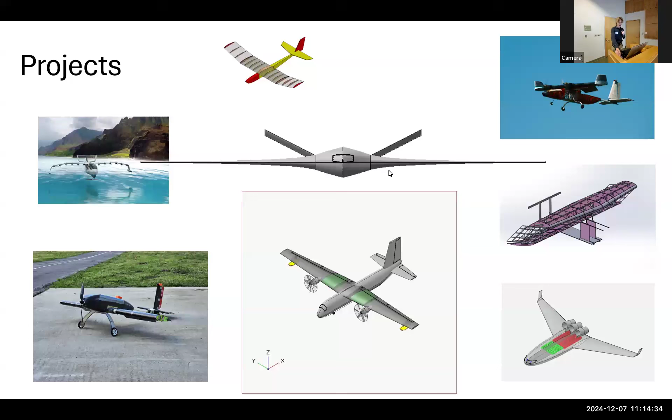So somebody actually reached out to myself and my colleagues at the Human Powered Flight Research Team. Does anybody here know of Red Bull Flugtag by any chance? It's a competition hosted by Red Bull where you build essentially a hang glider and toss it off a platform. It's mostly a showmanship competition, but a very interesting aero problem. And so I got to have a little bit of fun with this.

Interesting configuration there. On the left is us testing a 2/7 scale model, and on the right it's the full scale thing. Unfortunately, we had a bit of a structural failure, so the flight wasn't quite majestic. Still glided around 40 feet, but a very, very fun experience overall.

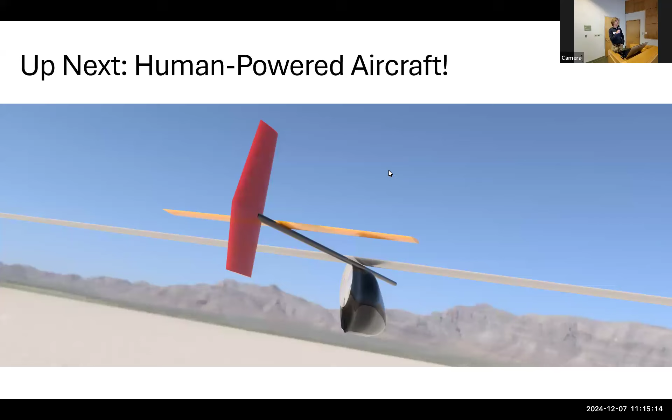And up next, human-powered aircraft. That's what I'll probably be busy with for the next couple of years at USC. So let's get into the topic of today.

The talk is kind of split into three parts. I'll first give an introduction to the motivation behind this, which is solar radiation management. Then I'll talk about my design. I'll try to fly through that pretty quickly because at the end I have some exciting work that I've been doing, specifically a piece of code that I've written for performance analysis that gave me some results, but there's a lot of next steps there. I'll talk a little bit about that. But yeah, so let's get started.

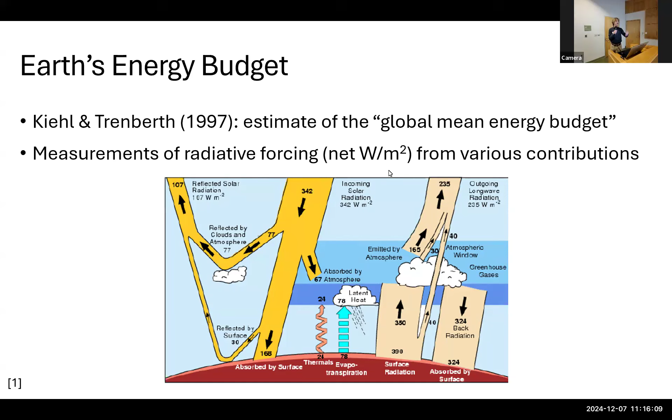In 1997, two scientists published a very important paper that essentially summarized and quantified where energy is absorbed and reflected into and out of the Earth and within it. This diagram became known as the Trenberth diagram, and it's essentially a summary, in units of watts per square meter, of where energy stays or leaves the atmosphere. And in the topic of climate change, with temperatures rising around 0.2 degrees Celsius per decade, this is really important if we want to understand how we can mitigate the effects of this.

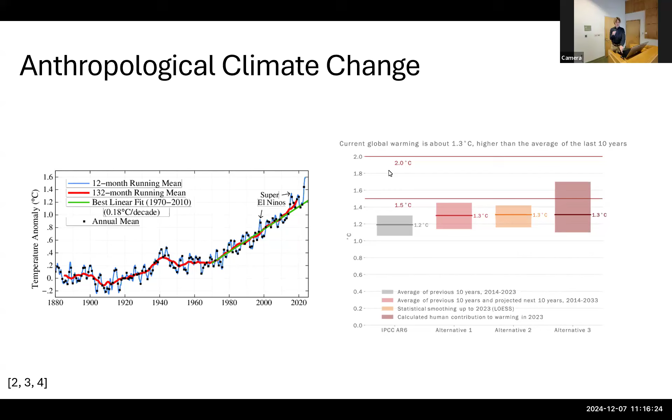So there's a couple of options. Option number one, which is what is used most and what has been most studied and is implemented the most currently, is to address this right side of the diagram. So reduce how much heat we are keeping in the atmosphere by absorbing it, mostly due to greenhouse gases.

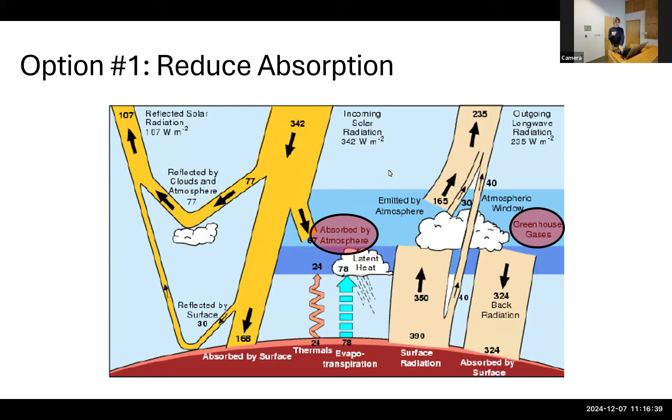A couple of interesting papers that I've read and some interesting findings is it's been pretty well shown that it's technically feasible to halt the increase to achieve greenhouse stabilization. Although a lot of these models assume pretty optimistic use of carbon sequestration methods and even some economic and legal ways. For example, the European Union emissions trading system, which is far into the program.

And another interesting thing I found is a lot of people are also warning of this term called mitigation deterrence, which is putting too much optimism into carbon sequestration instead of just reducing carbon emissions in the first place. Another interesting thing that I actually learned from Dr. Bradley's class.

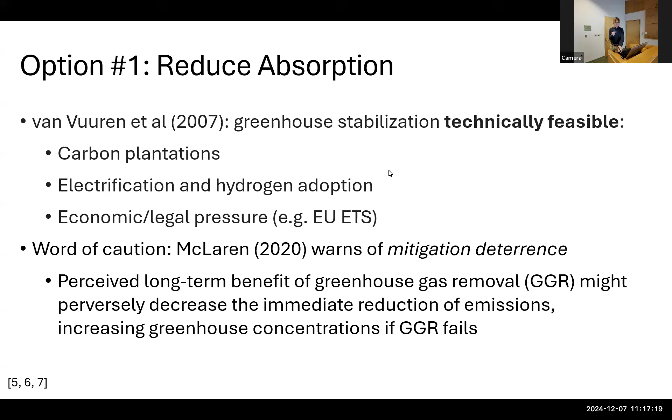So there's already people doing this in the context of aerospace. There's a startup that sends balloons, which is essentially a fridge. They claim they're taking advantage of more efficient sequestration methods in the lower temperatures.

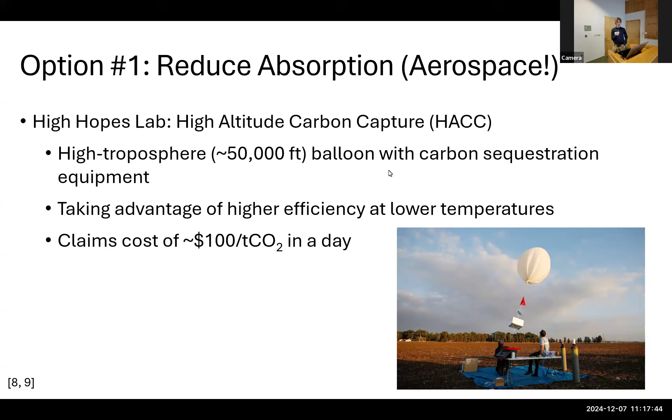Of the high troposphere, and even claim that there's a lot of cost benefits. So there's definitely potential for aerospace to jump on the right side of the diagram.

However, what this competition was about is the left half of the diagram. Another option, instead of decreasing the amount of carbon we keep in the atmosphere, is to increase the amount of heat we reflect, a lot of it from clouds in the higher stratosphere.

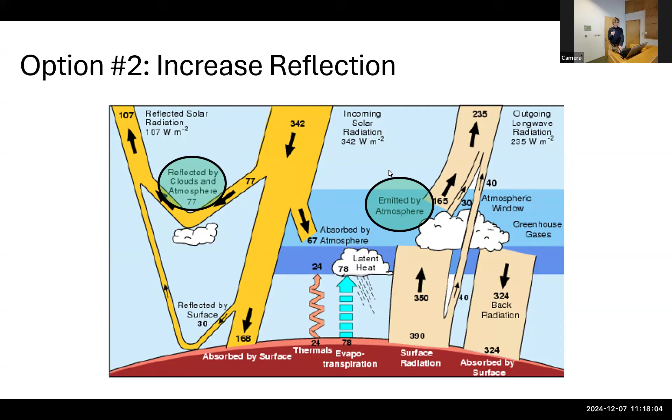A lot of the motivation behind this came from studying periods after volcanic eruptions. There was a major eruption in 1991 that was very well studied, and a lot of things that were observed, most notably reduced temperature around the eruption because of the release of sulfur into the atmosphere.

There's been a lot of research into investigating the artificial release of sulfur as analogous to natural phenomena. But the truth is, there's still a lot of unknowns and potential negatives with this approach, including but not limited to ozone damage. There was a big campaign against CFCs and the concept of ozone damage, and a lot of other potential negatives. So a lot of questions still to be answered with the research.

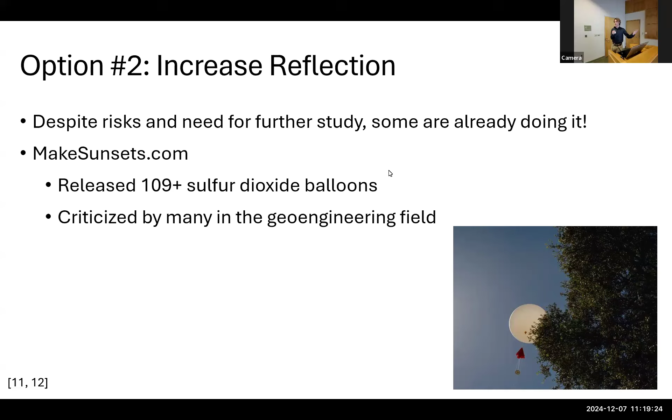Just another interesting example of how early we are in this process is there's some people already doing it. We're early enough in studying SAI and artificially injecting aerosols into the atmosphere that there's not a lot of regulation against it. Instead, there's this company that has already released hundreds of balloons filled with sulfur dioxide. They're criticized by many; others say they're moving fast and that's what we need to do to save the Earth. So the truth is, there's a lot of research still to be done in that area.

A little bit more about stratospheric aerosol injection, which is where aerospace would jump on this - the idea that we can artificially release aerosol into the atmosphere to reduce or halt the increase in temperature of the Earth. A few questions that come to mind naturally are: should aerospace even do this? Does it make economic sense for us to do this?

Interestingly enough, there was this paper in 2012 by researchers from Aurora, Harvard, and CMU, very smart people, that deemed that yes - and not only yes, very interestingly - that a new aircraft design would be most economically feasible to deploy the amount of payload we would need at the higher stratospheric altitudes. There was a lot of uncertainty surrounding engine design, and I'll touch on this a little bit later, but a very interesting finding from this paper.

The other question paired with that is, how much aerosol would we need? There's a bit of disagreement. The general understanding between that one joint study and some further studies from Yale is that around 1 megaton per year, between 1 and 5, to halt 1 watt per square meter - and on the upper end closer to 4 - would be enough to offset around 50 years of increase in radiative forcing in watts per square meter.

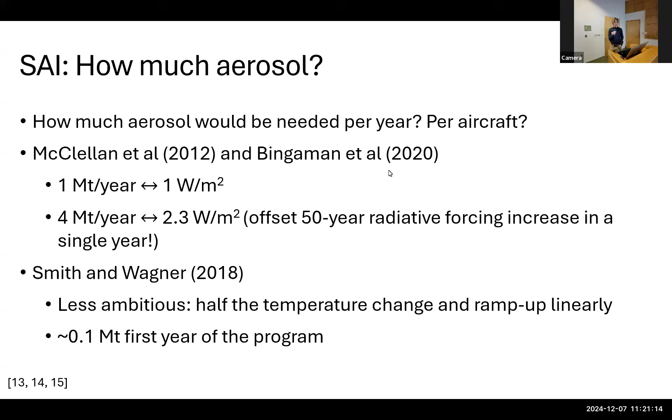However, some other researchers claim that even in the beginning of a potential program to develop airplanes that release stratospheric sulfur, we could still have significant progress. One paper assumes 0.1, around a tenth of what this competition was inspired by, and that would still have significant effects, almost halving the temperature change. Then from there, as we build more aircraft, we'd ramp that up linearly.

So in the topic of this competition, the request for proposal for the 2024 competition used numbers from a conceptual design by Yale researchers that I'll talk about in a bit. They assumed a fleet size around 180 to 220 airplanes - quite a lot - flying 3 sorties per day, requiring a single airplane to fly 30,000 pounds of payload to 65,000 feet. That's a lot of payload to a very high altitude, and it's hard to find a design nowadays that's able to do it.

Hence the need, or the question, of whether we should design a new one. There's a lot of interesting requirements here. Research indicates it would need a more uniform dispersal of the aerosol, which would have to be deployed around plus or minus 15 degrees of the equator. So these airplanes would also have to be capable of deploying themselves - we need ferry ranges of up to 3,000 nautical miles, another thing to keep in mind when designing something like this.

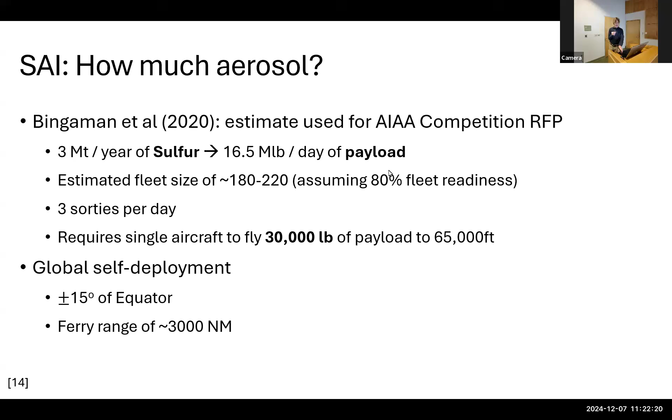So a little bit about the baseline design for this competition, which was the SAIL-01 concept.

So this was an airplane designed by some Yale researchers, capable of lofting 30,000 pounds to 65,000 feet, so the assumptions mentioned before. They went with a conventional configuration.

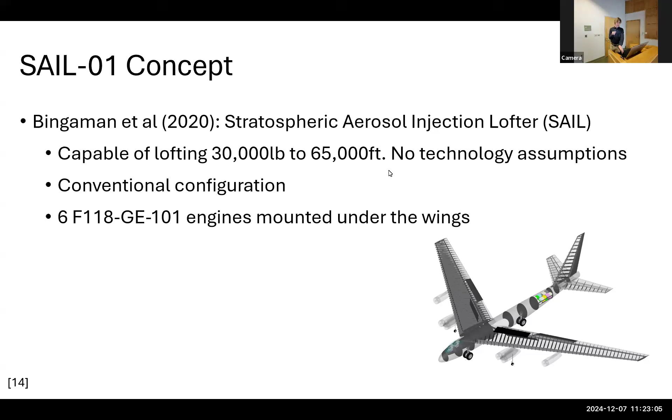Engine selection was a big question mark, but they ended up going with these F-118s, which I believe are the engines that power the U2, if I'm not mistaken. But the problem there is low Reynolds numbers effects at super high altitudes bring a fear of compressor stall. So you would have to have engines that are designed specifically for that purpose, or at least capable of flying that high. A little bit more of a 3-view diagram there.

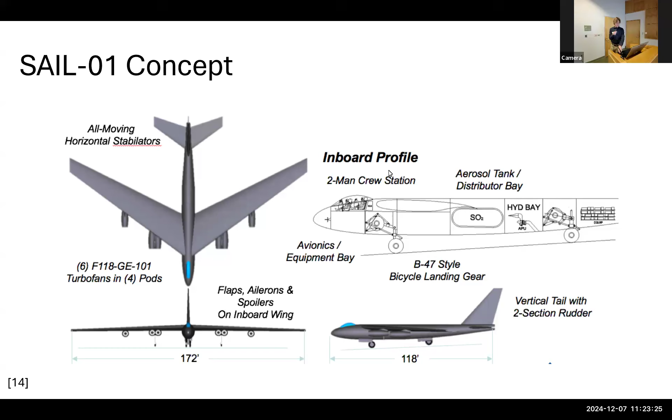This is also from their paper. So interestingly, the payload density requirement is actually not terrible, and that's where one of the opportunities for something like a blended wing body would come in. But yeah, conventional configuration, 6 engines mounted on the wings.

It's also worth noting that they didn't assume any existing technology or any gain in technology by the entry into service, which I believe was 2035. So their idea was also to design something that can be built today. And that brings us into the competition.

So this is a summary of the requirements. Also important to note that this is not leaning towards or against SAI. This is just answering the question that if it is determined by very smart people that SAI is safe and the thing that we should do, then what might an aircraft designed for that look like? And the requirements for this competition in particular called for a flight crew of 4 and 30,000 pounds of payload into stratospheric altitudes, and also a ferry mission of 3,000 nautical miles, which will come in a little bit later.

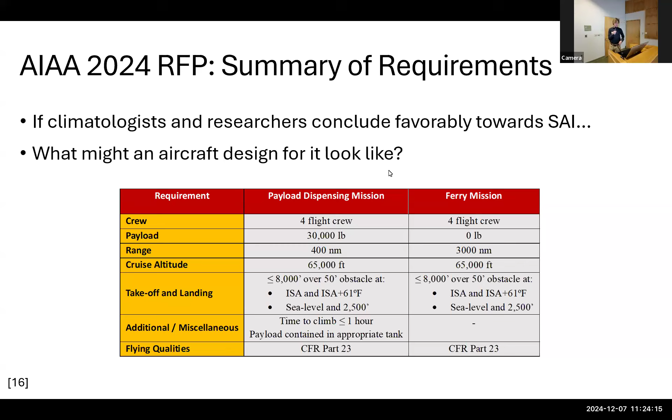But with that, I started the design of StratoSOL. So I'll go through my design really quickly, and then talk a little bit about some analysis that I've done after the fact. But the main performance problem, the performance challenge of flying in the higher atmosphere is without doubt the density.

So the density ratio, the ratio of density at 65,000 feet compared to sea level, is around 7%. So that hurts a lot. In aerodynamics, the lift you get is directly proportional to the density, so that's a direct hit there.

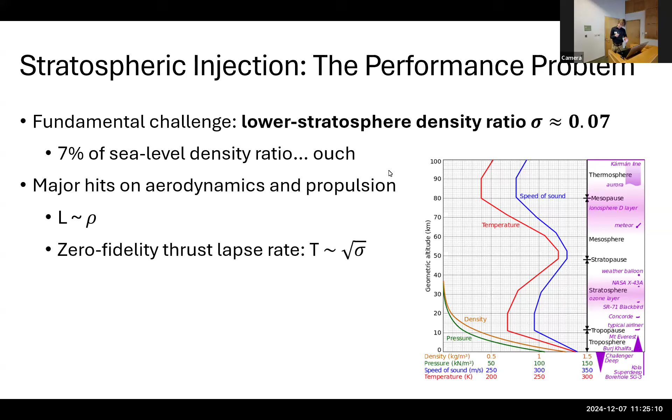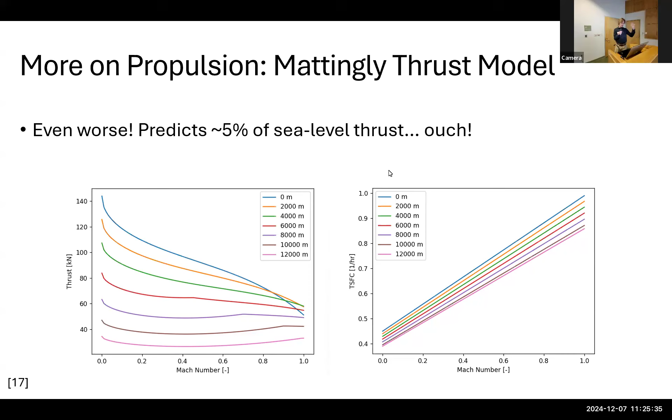However, some other models, which I used in my codes and I'll talk about later, predict even worse outcomes. These, I believe, are based off of engine decks, and it's described in J.D. Mattingly's propulsion textbook. These models assume something closer to a 5% ratio of available thrust at altitude versus at sea level. So that hurts quite a bit.

Looking at similar designs, which is something that I also did in the paper, and that the Yale design does very well. Something to note about these airplanes is that there's a very high thrust mismatch, because you lose all of that thrust climbing to the upper atmosphere. You're left with really high thrust to weight ratios at sea level.

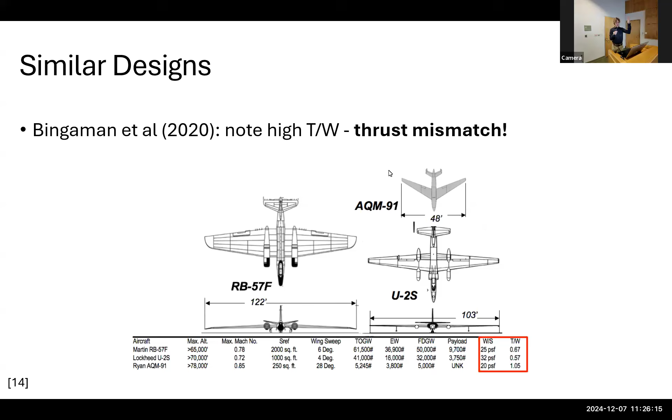In fact, an airplane like the U2 has a thrust to weight ratio of 0.6, which is around 2 times what a commercial airliner has. And in fact, if you watch a video of a U2 taking off, it's quite remarkable. It takes off in like 1,000 feet. So really cool thing to see, because it just has to carry all of that extra thrust to be able to fly at stratospheric altitudes.

There's also a design question of speed, and this is intimately related to the coffin corner, which I'll talk about later. But the question is, you're fighting so much for lift up there, so it makes sense that you would want to fly as fast as possible to reduce your lift coefficient, and hence need a lower wing area for the same lift at altitude. But it's not as simple as that. This is a big question to answer.

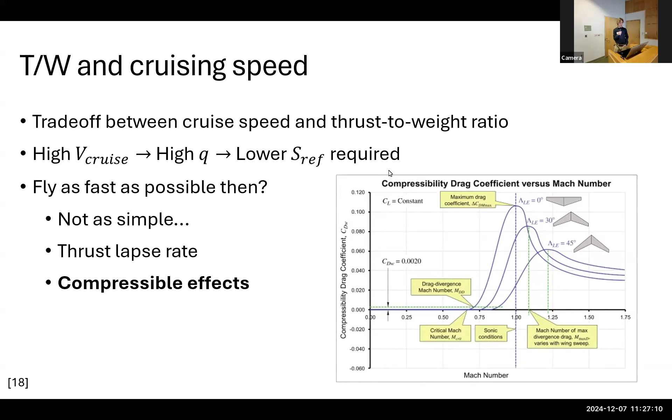Because getting a little bit more thrust available to overcome that drag is really expensive when you're losing so much thrust while climbing to 65,000 feet, and also compressible effects come into play, which is something that, as I found in my later study, is pretty hard to model, and I'll also elaborate on this a little bit.

So now a couple of notes on why a blended wing body might be a good idea here. Just identifying a few configuration opportunities that might raise that as a possibility.

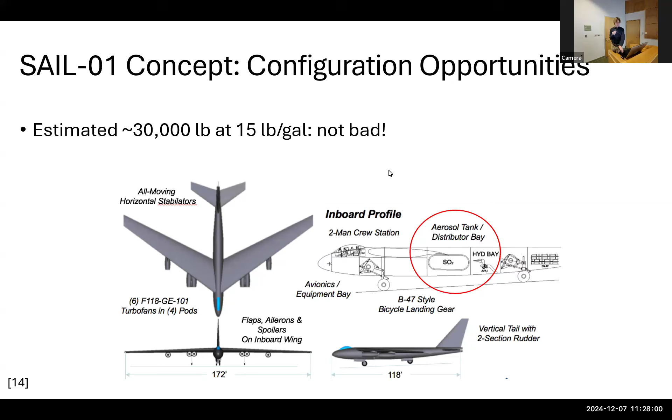First of all, the payload density is not that bad. You can see in the Yale concept, for example, that their internal volume requirement just for the payload is not really severe, with a density assumed in the competition of around 15 pounds per gallon. Compared to the sheer wing area required to sustain flight at 65,000 feet, that is not a huge constraint in terms of configuration. There's also a lot of aeropropulsive opportunities from hybrid wings or blended wings, and this is just a very interesting quantitative argument for that.

This is from Raymer's design textbook. In there, he lays out a statistical study of maximum lift to drag ratios versus the ratio of wetted to reference area, which is just how much wetted area you're using to generate lift. There's a very unimodal increase in maximum lift to drag as you use more of your wetted area to generate lift.

Maximum lift to drag ratio is a very key design variable when you're flying at 65,000 feet because thrust is so expensive, so you're going to take a big hit in thrust to weight ratio versus wing loading. The horizontal axis on the right chart is the wetted aspect ratio, which is proportional to the ratio of reference wing area to wetted area.

In Raymer's textbook, he uses that as a way to estimate maximum lift to drag ratio with some fitting constant for different types of airplane. But statistically, there is a trend with wetted to reference area and maximum lift to drag.

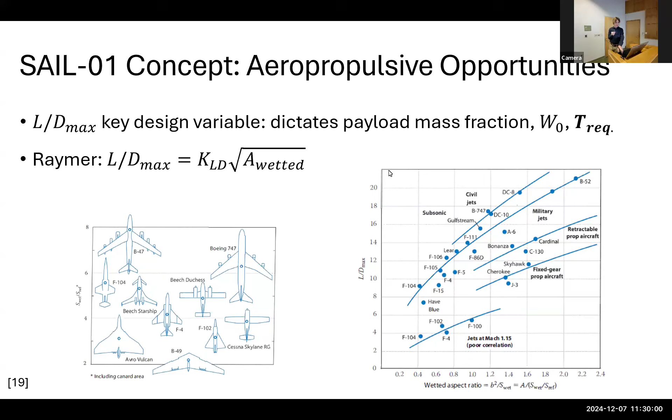This is just a bit of a summary there, covering most of these points. There's also a lot of typical penalties of blended wings, or arguments generally used against them, that are diminished here. You don't really have to pressurize a cabin because it's just a crew of 4, and takeoff rotation, which is sometimes an issue, is basically irrelevant -- though that's a strong word, but more detailed performance studies show that this can meet takeoff requirements of 8,000 feet with not a lot of problem, because you have so much excess thrust needed to sustain flight at upper atmosphere.

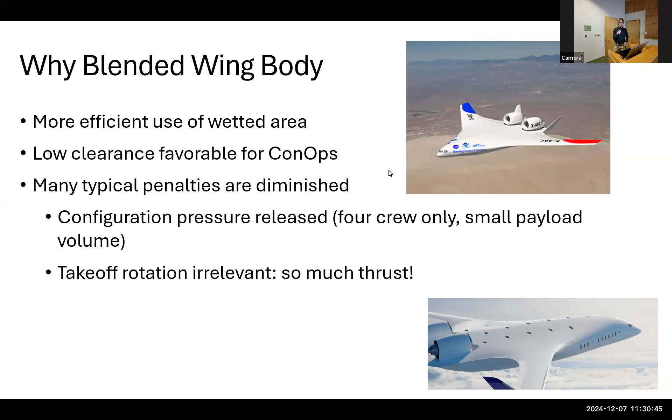So with that, I'll go through the design process and then conclude with a little bit about some further analysis, following the chronology of the report itself.

I started by doing what's called a constraint analysis -- a plot of thrust to weight ratio versus wing loading for a bunch of different performance metrics. This is one way to hone in on a design space for an airplane. Every point on a line, and each line is one performance requirement, satisfies that performance requirement. There's also an inequality: if you want to satisfy, for example, a climb constraint, any point that lies below that line doesn't satisfy it, which restricts your space, not just along the line.

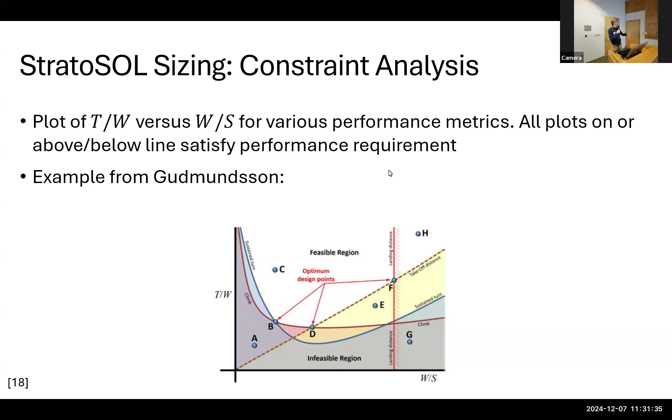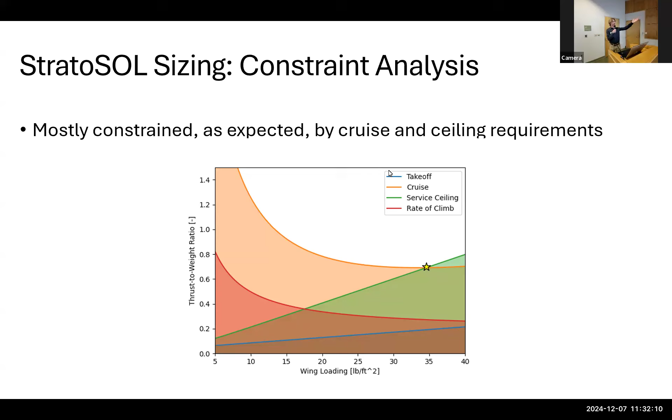I also did basically the inverse of constraint analysis. So instead of picking a performance requirement and then varying thrust-to-weight ratio and wing loading, you can do the opposite.

So you can pick a thrust-to-weight ratio, wing loading, and see what the resulting performance requirement is, then vary thrust-to-weight ratio and wing loading. This generates what are generally called carpet plots, which gives some more insight into the design spaces. Also called baseline trades, because you pick a baseline and then vary your design by a little bit and see how that changes.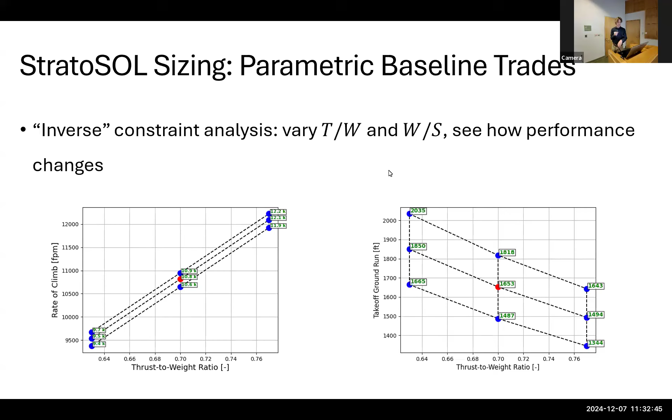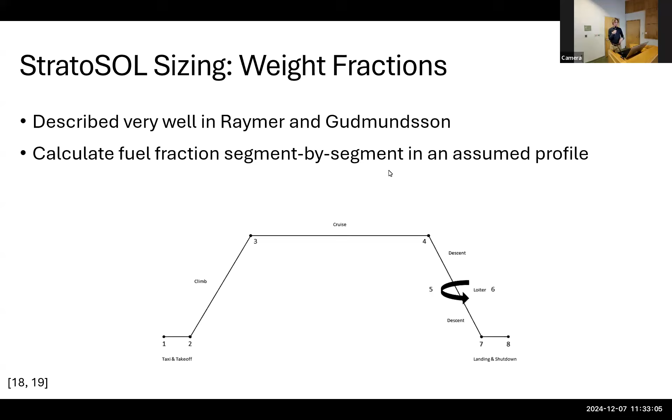For sizing weights, and in general aircraft design, you size for a weight, do the layout, analyze it, and see if it meets the performance requirements. For the weight sizing, I did what's well described in books like Raymer and Gudmundsson. Essentially you assume a mission profile, calculate fuel fractions segment by segment, and for empty weight fractions generally use a statistical data fit. This is a power fit, so linear in log, and you converge on your weight like this.

You guess an initial takeoff weight, calculate the empty weight fraction and fuel fractions for that mission, then calculate the takeoff weight again. If they match, you go with it. If they don't, you iterate until it converges to a solution.

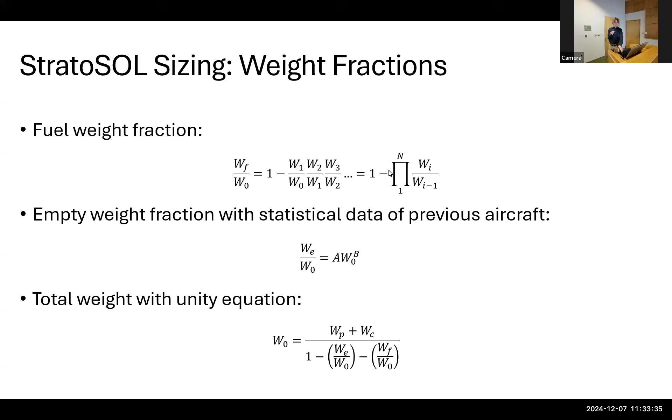After that, a little bit of layout. I did it mostly in OpenVSP, if anyone's familiar - that's a piece of NASA software that is very, very nice for layouts. There was a question here about the configurations and the aero being very closely related, because the airfoil selection here also dictates internal payload, so I did some studies about that.

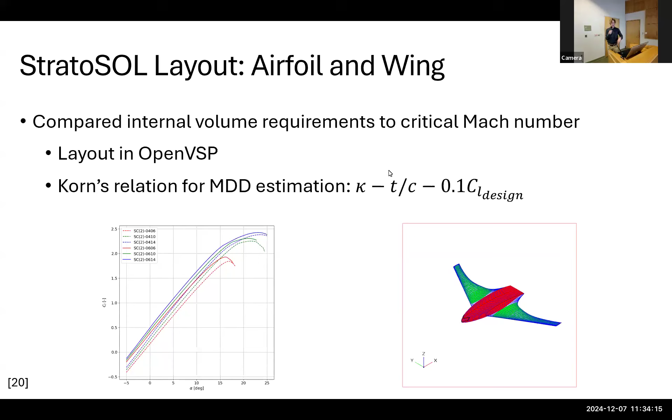There are some methods to estimate divergence, drag divergence Mach numbers - that's one example there, also laid out in the report. That's Korn's relation, so you have that constant kappa cataloged for a bunch of NASA supercritical airfoils.

And here are some further views, so further layout also in OpenVSP. On the right diagram it's missing a bunch of systems, but highlighted are fuel volume requirements and the internal aerosol tank. You can see that even here, the internal volume requirement is pretty small compared to the rest of the internal volume. The difference being that the center section is now also reference area, so it's more lifting than a conventional tube-and-wing fuselage.

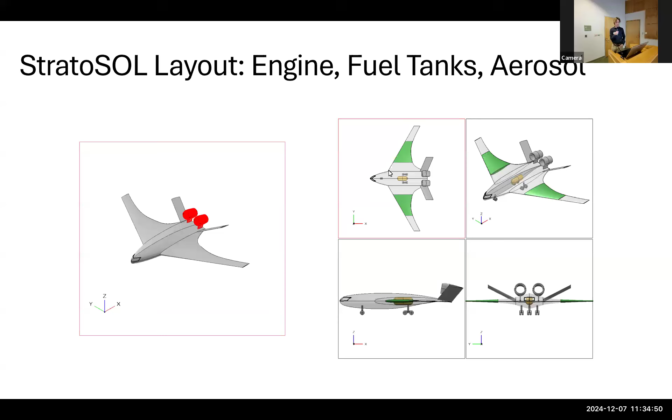Also did some weight and balance analysis. In the down-select, I opted to use those vertical surfaces at the end, similar to a picture I had on board - if anyone's familiar with the X-48C, NASA did some studies with that and flight tested that configuration back in, I want to say, the early 2000s, possibly earlier. So I did some weight and balance there. The idea of the vertical surfaces is it just gives you some leeway with static margin, pushing your neutral point a little bit aft.

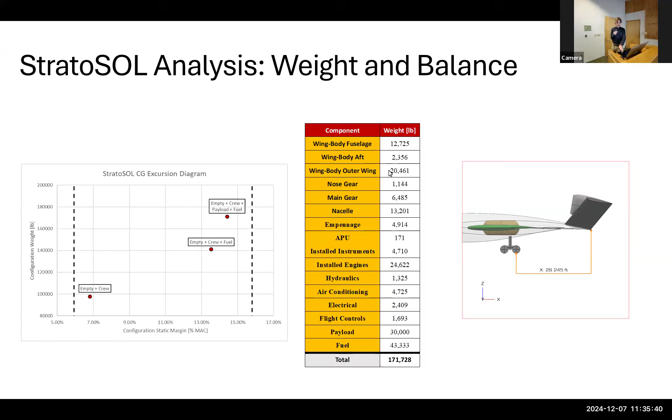It's also worth noting there is good literature on higher fidelity weight models for blended wing bodies, which is super interesting and something that I used in the report. I concluded with some analysis - aero, propulsion, stability and control, and finally performance.

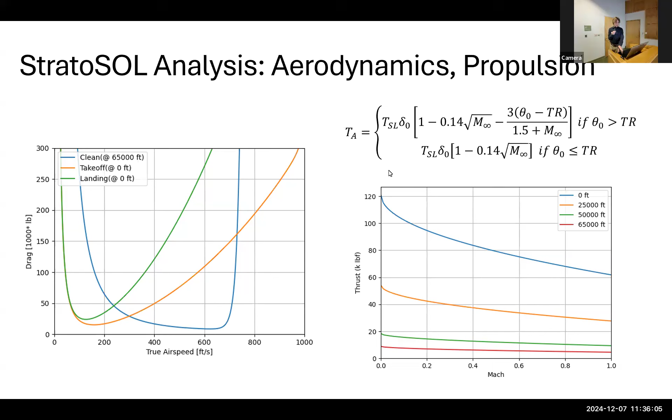So I worked out some drag polars. On the right there is Mattingly's thrust model, which is a bit higher fidelity thrust model, mentioned before - that's that thrust model on the right. Also did some stability and control analysis with some commercial software, things like XFLR5 and AVL, and also calculated some aerodynamic efficiencies, spot checking at each stage of flight.

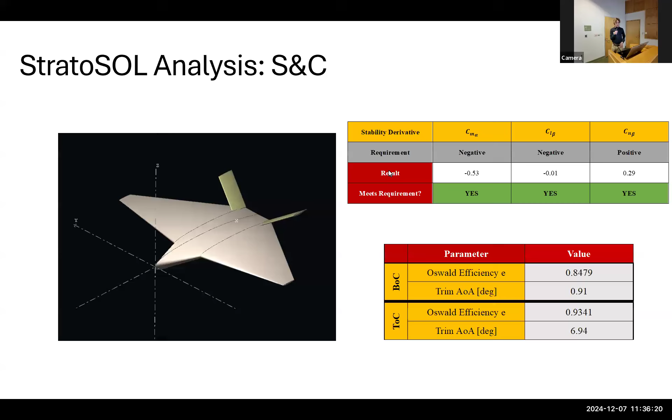And finally, performance analysis, which was a bit of a sigh of relief, though there is definitely more work to be done here, which I'll show starting in the next section. But just some thumb plots - flight profiles and flight envelope plots.

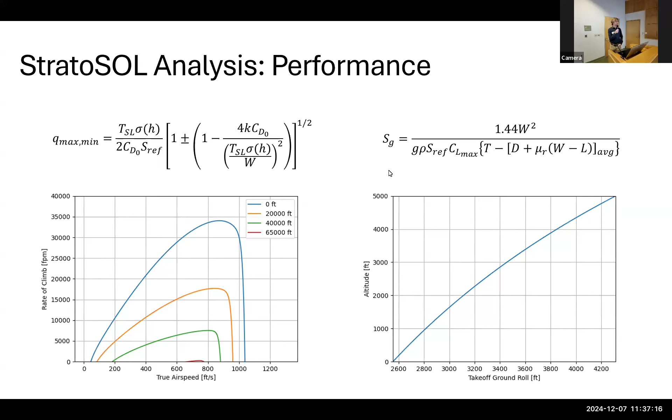And also, interestingly, and sort of as expected, takeoff is not a huge problem. The requirement was 8,000 feet; this airplane would be able to take off closer to probably around 2,500 feet, just because it has so much excess thrust.

So that concludes the design itself. Now I'm going to talk a little bit about some work that I did after - I'm calling this StratoSOL Revisited.

The inspiration for this is that those parametric trades I mentioned early on are good and give some insight into the design space, but could do better. As I mentioned, there's big questions here, such as how fast can you, and how fast should you cruise, and some other performance problems such as the engine problem.

There's a lot of space here to do some higher fidelity work, and this is a highly interdisciplinary problem, as is a lot of aircraft design. Myself and another colleague, Nicholas Nototsky, shout out to him for our flight mechanics class, developed some time-based codes. Over the following summer I took that code base and put it into a framework in Python with a nice object-oriented structure, making it pretty modular so you can use a bunch of different models as you wish. I'll talk about that a little now.

So this is the sort of things you can do with this code. You'll note that everything I presented to you on the report was pretty analytical, so these were models that are essentially equations, but not a lot of simulation work. This allows you to do something a little bit higher fidelity. What this code does is it essentially integrates the equations of motion of an airplane over time.

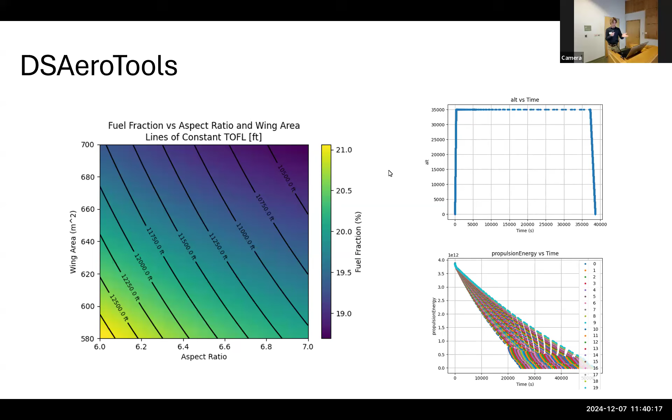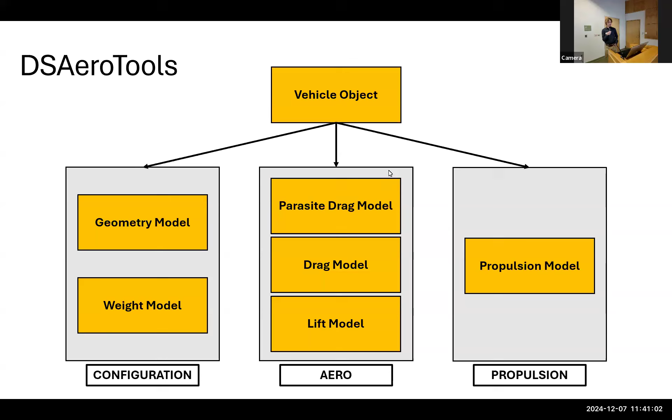I'll give examples on the next slide, but if anyone's familiar with design literature, there's a bunch of different models in Raymer, Roskam, and Gudmundsson has a bunch of models as well. You can also choose different models relating to the physics, so parasite drag, lift, and propulsion, which is really handy. Some examples of what I've implemented in code, most notably blended wing models, which allow me to do some analysis, but also bigger changes like different propulsion models.

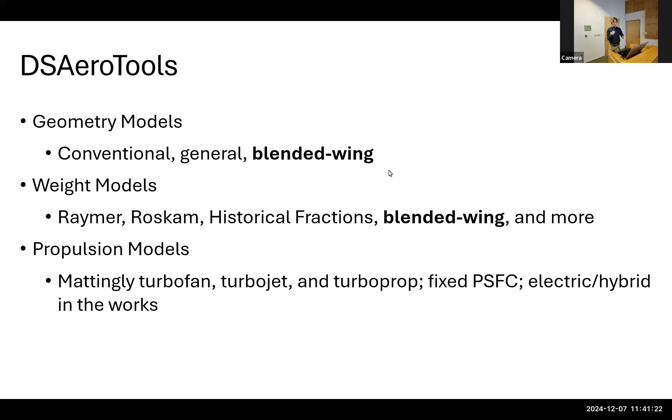I'm working on an electric and a hybrid electric model in the works, so you can size and design a bunch of different airplanes with something like this. A little more about how a mission is actually simulated: the user gives some inputs, a baseline geometry, chooses which models to use. Is this a blended wing? Is this a conventional aircraft? What sort of propulsion will this use? Then it designs a mission profile from a bunch of different segments.

For this analysis, for example, I wrote a payload dispensing segment where not only do you cruise, but you let out payload at a specific rate. Then you converge the mission, the idea being that you guess something, simulate, and then check if the convergence is valid.

So essentially you're checking if the final energy is 0. If it's not, if you have extra fuel when you finish the mission, then you can fly with a little bit less fuel. So you reduce the amount of fuel and simulate it again. And then the end of it is a bunch of data, basically.

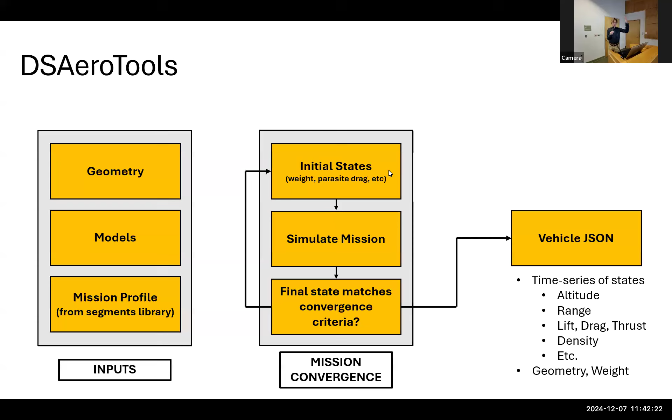Just for reference, like 400 airplanes turned out to be around 40 gigabytes of just numbers, just things versus time, and also information about which models the user picked.

Another note is I've set it up so that you can run this mission convergence scheme in two different ways. One of them is mission fixed, so it's the example that I gave. You fly through the entire mission. If you still have fuel left over, reduce the amount of fuel, fly it again. If you have a negative weight for the fuel, it means you didn't have enough fuel. So you sort of converge on a zero final energy by changing the fuel.

But you can also run it in a different scheme, which is useful for ferry range studies, for example, which is that instead of varying the amount of fuel, you vary something about the trajectory. So you fly the entire mission with a fixed amount of fuel. If you still have fuel left over, it means you can fly a little bit further. So it iterates on a range of one segment, for example, which is what was used here to simulate the ferry ranges for these airplanes.

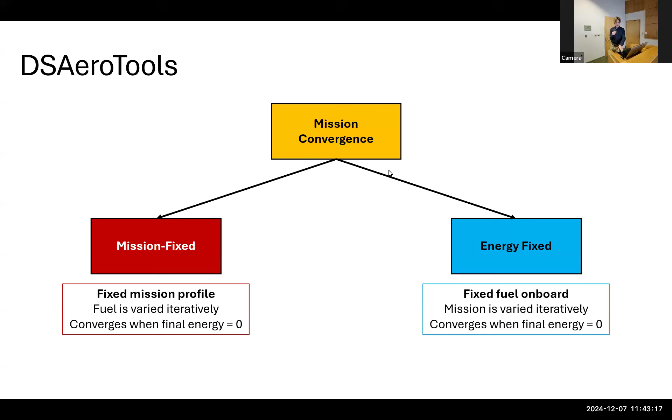I ran a bunch of a small validation study. If anyone's familiar with Stanford's SUAVE framework, this is a pretty well used design and sizing framework. So this is simulating a 737-800 with pretty low fidelity lift and drag models.

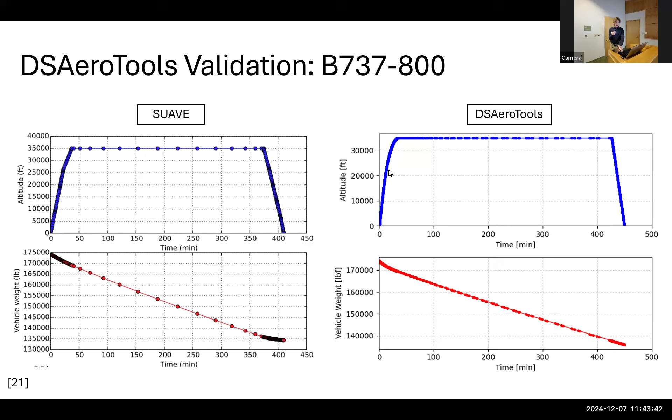You can see that the mission profile ended up being pretty reasonable, and some of the energy related parameters gave pretty good results as well. So fuel burn and lift to drag ratios and some aero parameters were pretty close to SUAVE. And just for reference, this is an airplane that's flying 2,500 nautical miles.

I found online that the 737 is going to hold between 162 and 189 passengers, and a takeoff weight around 175,000 pounds, which actually turned out pretty close to StratoSOL. That was just by chance.

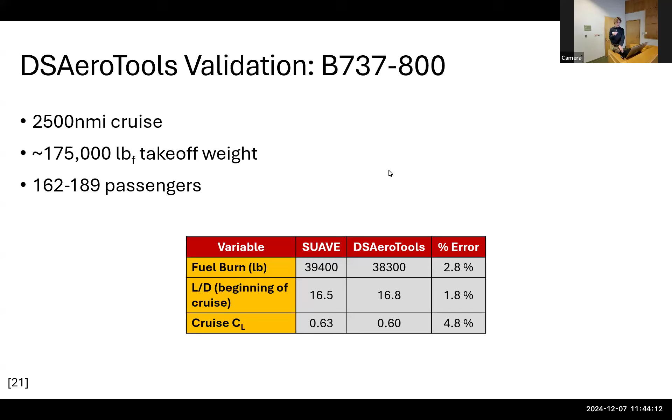So what lessons did this code that works reasonably well tell us? Mostly, it just raised a bunch of questions. So I'll present some interesting, a little bit funny sometimes, results, but that might give some insight into this problem. Definitely elucidates the point of the coffin corner.

So, number one, modeling can be pretty hard, and this is a funny result. When you're flying at 65,000 feet and at Mach close to between 0.5 and 0.8 is what I was looking at, some of the numerics can get tricky.

This is a compressible drag model that we learn in our flight mechanics class, and it works reasonably well for commercial transports. But when you start pushing it to these limits, it can break, and there's some indication that it might break. You can imagine that a computer might have a bit of trouble dealing with such large exponents, and that showed in the simulation results.

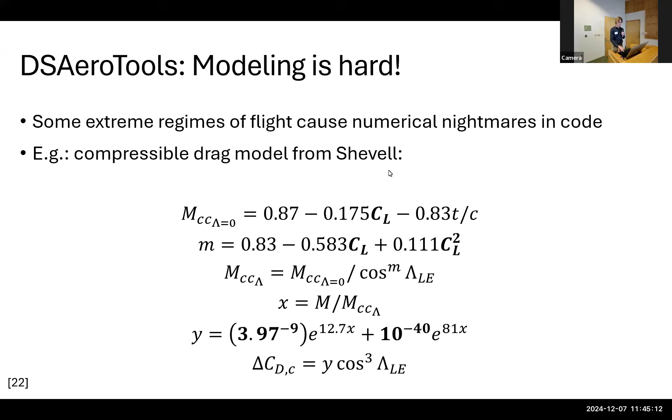For reference, this should be closer to generally counting drag in terms of counts, so a count of drag is 10 to the minus 4. That's a lot of orders of magnitude higher than it should be, and the reason for that is because that drag model is blowing up.

So having a bit of trouble modeling these things, but something like what's done a lot also in performance and sizing is something closer to a surrogate model where, for example, you might take this representative geometry in OpenVSP and then sweep, and OpenVSP has pretty good models for wave drag, definitely much better than a CD of 50. You can basically sample drag coefficients for example, variations of speed and angle of attack, and then interpolate between these results. So that's a good next step to investigate things like this.

Let's assume for now that this is a really nice world and there's no wave drag, which is not a great assumption for Mach 0.8, but just for the purpose of looking at the performance of this thing. That still shows how important Mach number is.

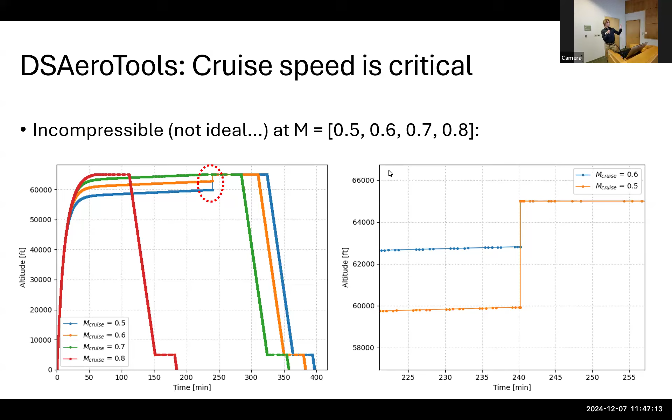So on the left here, I have four airplanes, the same geometry run for four different Mach cruise numbers. The interesting result you would think is that as you increase the Mach number, your drag and energy requirements get terrible. But if you run the other way, that's not much better, and that's because of the coffin corner. Interestingly, the results for the lower end of the Mach range, 0.5 and 0.6, had trouble climbing, because it was hitting that left end of the coffin corner.

These are some other states investigated over that. On the left you have drag coefficient, on the right you have throttle, which is really the ratio of required thrust over available thrust. If you have a throttle higher than 1, that's no good. The cruise starts in this segment here, just linearly ramping down. You can see that, interestingly, as you decrease Mach number and move up on this plot here, decreased Mach number gives a much higher drag coefficient during cruise, and that's because your induced drag is going way up after you're stalling. Same thing for the throttle.

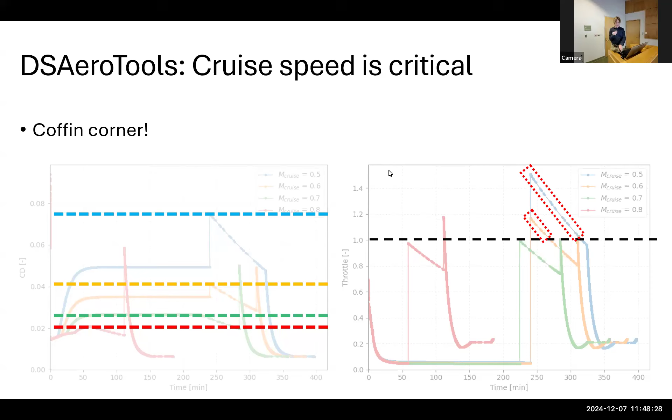These airplanes at the lower Mach numbers cannot sustain flight at 65,000 feet, which is very interesting. Also, when I say stalling here, for the purpose of the code, the plane doesn't really stall; it just continues the mission. But if you analyze this in post-processing and see that the throttle is higher than 1, then that airplane cannot fly the mission. So you figure these things out in post-processing.

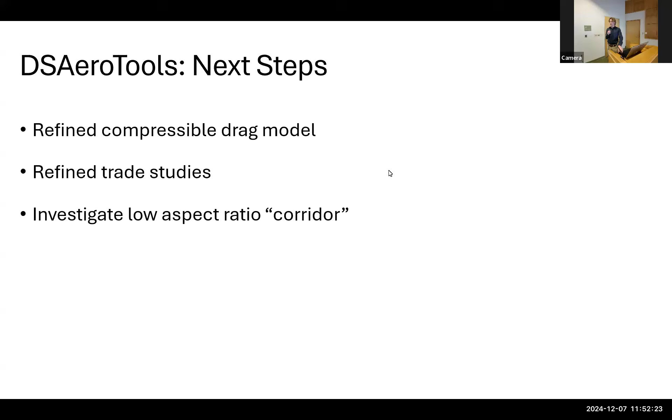So yeah, that's about it for me. Let me thank a lot of important people. First of all, Ken, thank you so much for inviting me to do this - I really, really appreciate it. I had a blast doing this project and was super happy when he reached out to invite me to talk.

And last but certainly not least, huge thanks to Dr. Spedding. He advised me not only for this competition but also for my first one, and it was an unequivocal and very quick yes every time I asked him - I really appreciate that, and really appreciate him bothering with me for an hour each week while I was working on this. Thank you very much, and thank you very much everyone for attending.

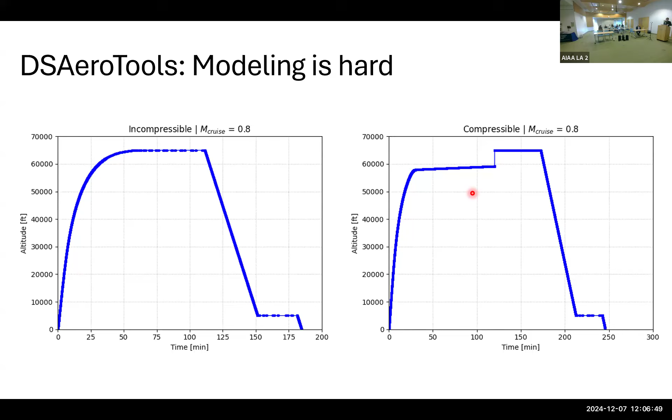When an airplane cannot climb, it doesn't just stop the mission. Instead, I set it up so the climb segment terminates after a fixed interval of 2 hours, at which point it goes straight to the cruise segment. If it can't climb, it becomes clear when it starts cruise that it cannot maintain level flight.

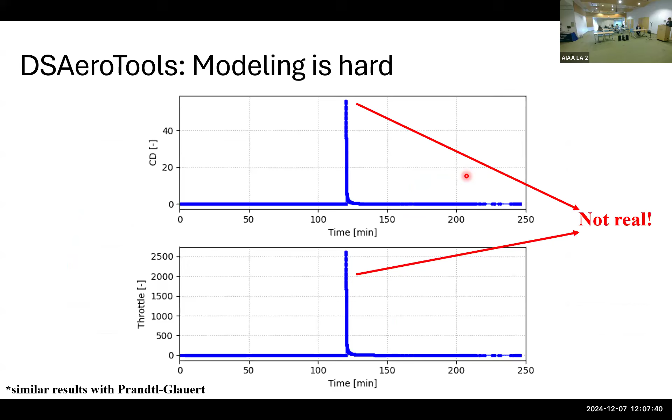You verify that in post-processing with isolines of throttle: if it's higher than 1, it can't fly, which is exactly what happens in that trade study. Also important: if the airplane cannot climb to 65,000 feet, it stays in the climb segment at a pretty high thrust setting for the full 2 hours I set as the termination limit. So it's burning a lot of fuel for basically fruitless work since it's not going to reach 65,000 feet, and this shows up in the trade studies.

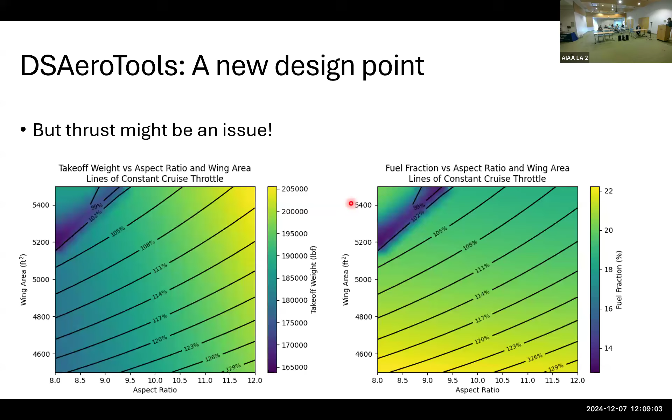I got a follow-up question on that. It looks like you hit your altitude and then you're just slowly climbing because you're burning stuff. What about your payload? You got 30,000 pounds of aerosol you're going to dump, right? Absolutely. So as you dump that, would you get up there pretty quick? Absolutely, your rate of dump. Yeah, that is a very, very good point.

Another good next step would be to instead have it set up so that this climb requirement just brings it to the termination altitude. If your rate of climb drops below, say, 100 feet per minute, so if you've reached your service ceiling, just terminate and start dropping payload. That is certainly something that can be done. Here I just set it up so that, if for some reason the requirement is a hard 65,000 feet, if you're at 64,500 you can't drop the payload, in which case you would just cancel the mission or something. That scenario would be what's reflected here, but instead of running through that climb segment until I'm out of time, I could just check if my climb rate has dropped below a certain threshold, start the mission, drop the payload.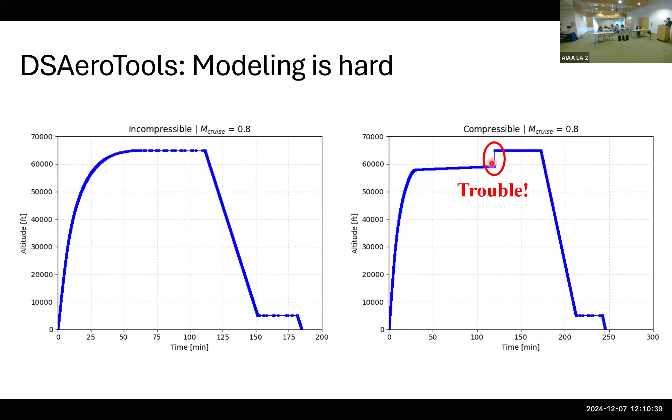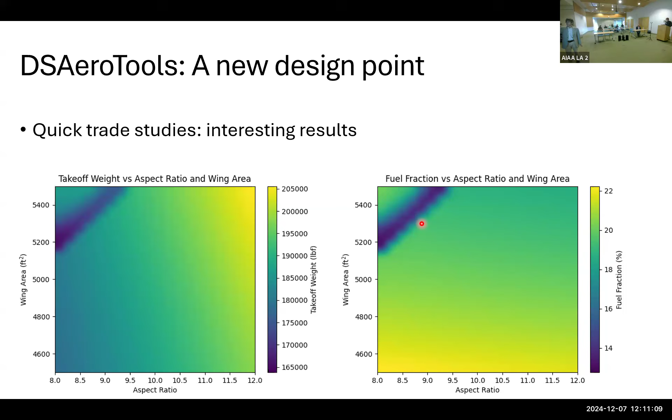So that's also something you looked at. Absolutely, what that would cause is it would probably splatter this sort of corridor into those lower throttle requirements, because those airplanes just wouldn't climb as high, but they would terminate the climb as soon as they reached that lower threshold ROC, and then start dropping payload. So it would just scatter that region to the bottom right, that lower fuel fraction region. Yes, but very, very good point.

Are there any models for turbulence? Because you can't climb as high if you have turbulence. Are you assuming stratospheric, so no turbulence? Yeah, no models. Too chaotic to model? To be quite honest, I do not know enough about modeling turbulence, and the only atmospheric modeling assumed is just the thermodynamic, pressure, temperature, density, following the standard atmosphere, U.S. standard atmosphere. Anything other than that, I'm working on it, but I think headwind would affect if you're tracking the 400 nautical miles on the ground versus in the air. But no turbulence modeling, which is something to look at. Interesting, I have to do some research.

I have a quick question. So how many, one payload is enough for one mission? You cover enough area, or do you have multiple payloads? Good question. So the model that the Yale research assumes to get enough payload per year is three sorties per day per aircraft, and a fleet size around 200 airplanes, in order to reduce the 30,000 pound numbers, to reduce 50 years of radiative forcing in 1 year. So that's a large number of airplanes.